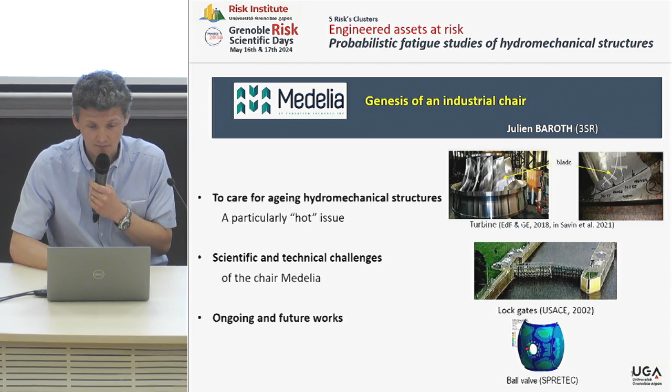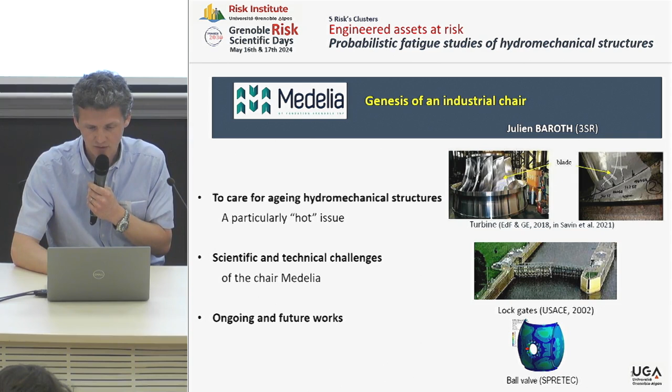So in our cluster, we proposed two little short focus. The first one is to highlight how the Risk Institute allowed us to initiate an industrial chair about the aging of hydromechanical structures, particularly the chair called Medelia. It means in Latin take care, about probabilistic fatigue of hydromechanical structures. And three very short items to explain why it is a hot issue, particularly around Grenoble, and some illustration just in the next slide.

Aging hydromechanical structures. Why is it a hot issue, particularly for engineers and for our operators in France and in the world? It is that we have many hydraulic works that are very old, several decades, more than one century sometimes. You have examples in pictures, lock gates. We have several thousand kilometers of rivers in France with such infrastructures. We have components of hydropower plants, for example, runners of turbines or ball valves. You have this example in front of you.

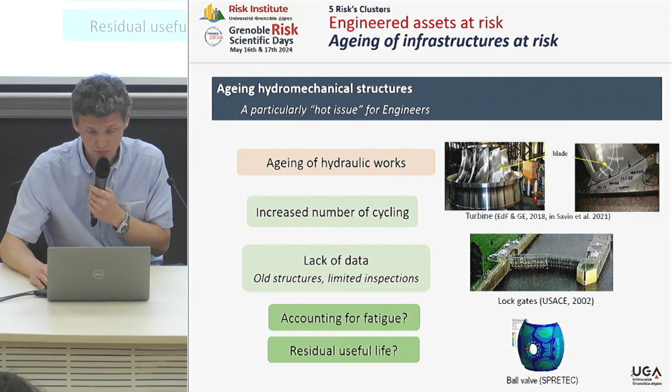And they have worked for decades, but instead of changing altogether, we have to take into account an increased number of cycles because of energy demand, of optimization, and because all these infrastructures are old, we also have a lack of data. How to account for fatigue, how to better estimate residual useful life. So this is a hot issue, particularly around Grenoble, because we have major operators in France and I would say in the world around Grenoble.

We have EDF, you probably know, the main electricity supplier in France, but also the main hydroelectricity supplier in Europe. CNR, for Compagnie Nationale du Rhône. This is a major operator along the Rhône River. It's a quarter of hydroelectricity in France, I think. And we also have large companies implanted in Grenoble for more than one century. Artelia, which is a group in the world with, I think, more than 1 billion euro sales.

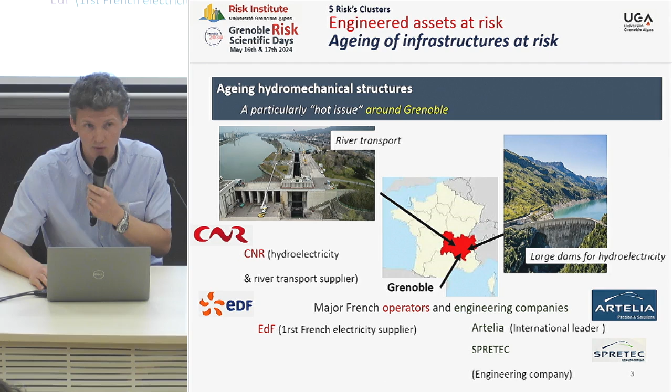All these actors, operators, stakeholders are interested by our research, and that's why we were consulted to help them, and it is because of a cross-disciplinary project that with Christophe Berenguer we decided to go and to try, because it was very challenging, because this team never experienced research with university.

And one of the results is this article, damage due to start-stop cycles of turbine runners under high cycle fatigue, with industrial data from the company, with a problem of instrumentation, with problems of mechanics from data, and because we were two complementary laboratories, it was possible and it was successful, and we provided an original methodology to estimate relative damage of runners and a cost indicator of start and stop phases of runners. That was really strategic for the company.

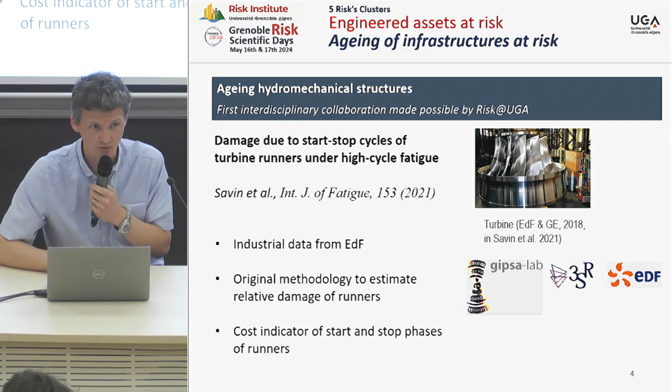So because of this experience, it was possible to accept another challenge with this large company called Artelia, particularly with an engineering company called Spretec, to help them deal with this fatigue problem of hydromechanical structures. And it began just this year. It is with another colleague, Rafael Estevez, who couldn't be there. He is from another laboratory, specialized in fracture mechanics, and I am more specialized in reliability analysis at the scale of structures.

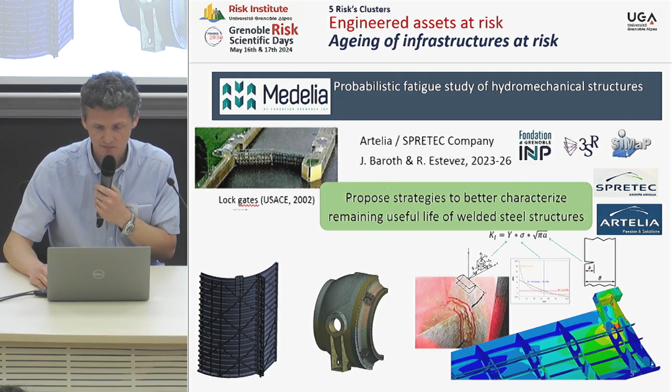And our aim is to propose strategies to better characterize the remaining useful life of welded steel structures more particularly. And you have examples of structures that can be studied in this company using experimental measurements, using finite element modeling at different scales. And the challenge is to account particularly for welded connections of, for example, lock gates that sometimes are not only old but with the beginning of fracture. So we have to change.

We have to plan maintenance to account for different uncertainties about material, about loading history, about geometry, boundary conditions, and we have some data also from CNR, another operator that is very interested in this topic, and we are all together developing some strategy about probabilistic fatigue analysis using the finite element model that I show you with a stochastic approach.

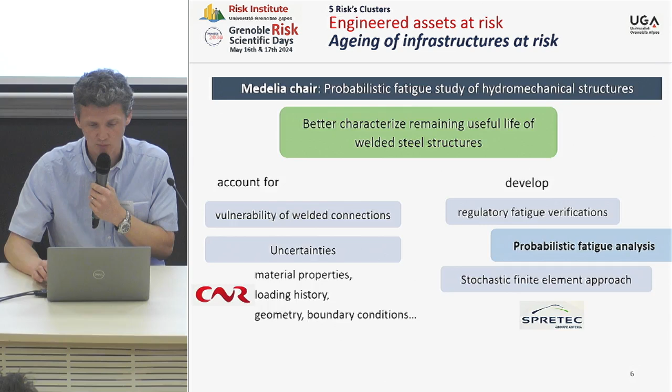So very practically, for example, for a lock gate, we can do the engineering study and focus on some assemblies, some connections that can be more stressed and with a probability of damage that can be higher from one to another. But it's very difficult for the operator to know if they have to change in priority because their estimations are too approximate.

So it is why our collaboration between two different laboratories, the colleague specialized in fracture mechanics at the scale of connection, me rather focused on stochastic finite element modeling, we are able to produce two-scale stochastic finite element calculations. We are producing new indicators. I'm already satisfied of results we have now to prove, to publish it, but it's ongoing work.

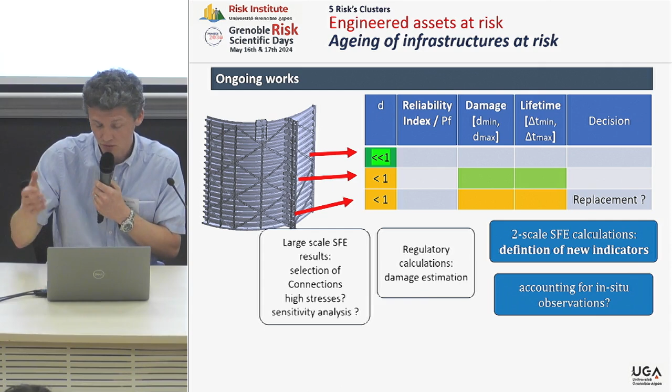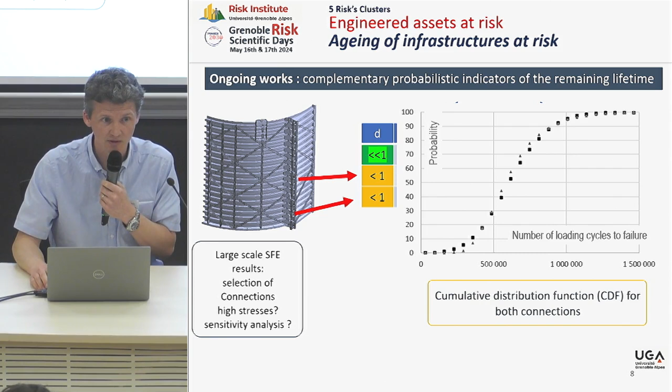And for example, a typical result, it can be a cumulative distribution function for all people working on probabilistic approach. It's very usual, but these cumulative distribution functions have to account for both fracture mechanics estimates and also stochastic finite element studies, because we cannot deduce everything from a too simple modeling at a whole scale of a structure. We have to invent, to be creative.

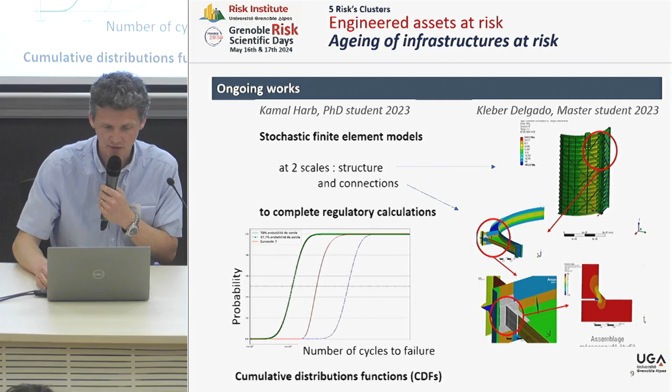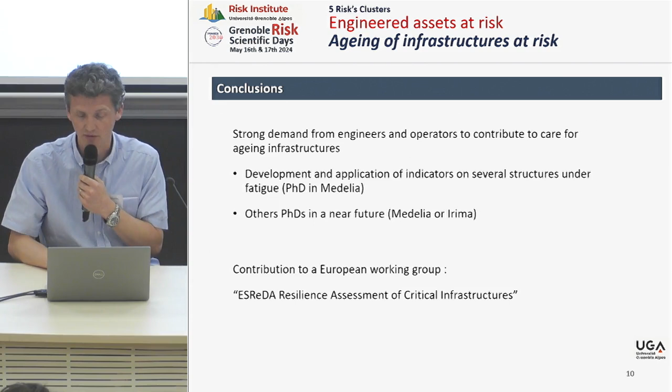And this is because of the strong demand from engineers and operators that we contribute like that to care for aging infrastructure. It's the name of the chair, Medelia. So we have other PhD in the near future in the context of this chair, but also in the context of a cluster. And particularly, we would like also to focus about a European working group called ESReDA Resilience Assessment of Critical Infrastructure. And I propose my colleague to talk a few minutes about that.

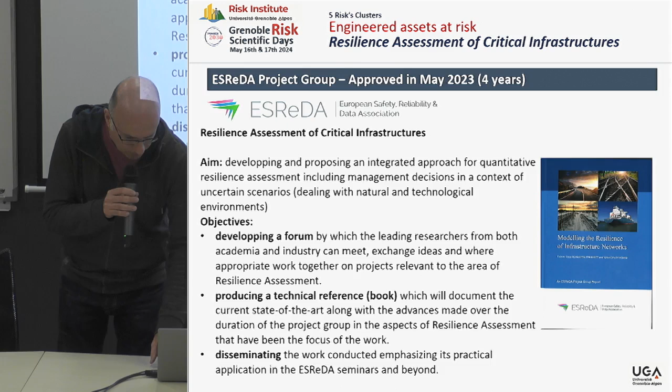Okay, I think we don't have that much time, so I'm just recalling in this slide the importance of resilience for critical infrastructure, that has become an important research topic, but also that has been transferred to the policy. For example, with the new directive that went in force in January 2023, naming explicitly resilience in its title, replacing the previous directive on critical infrastructure. And we are going to focus on resilience application for different kinds of critical infrastructures, each member of the group coming with its own knowledge on different kinds of infrastructures and sharing proven methodology and seeing how we can transfer this to other kinds of infrastructures.

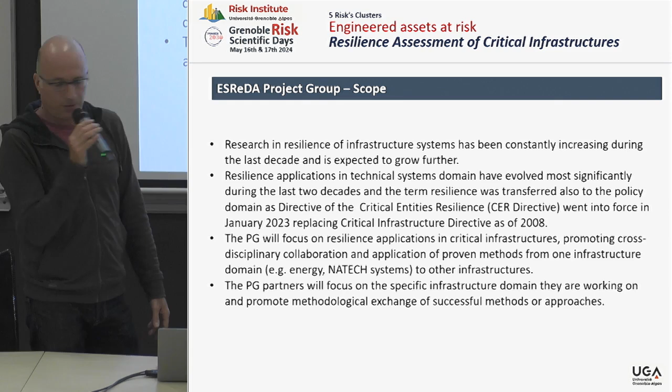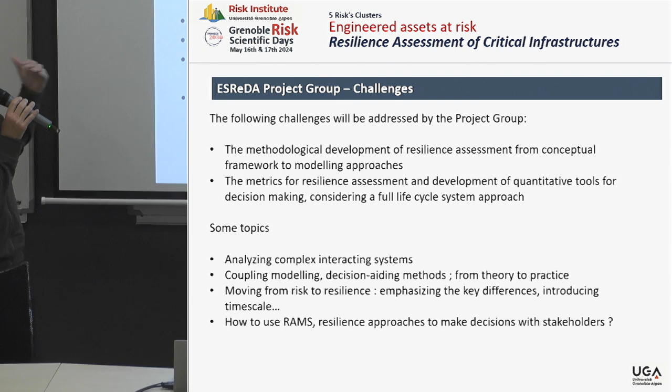Okay, so some of the topics that we have already identified could be, for example, analyzing complex interacting systems, coupling, or developing the complete chain from modeling to decision aiding applied on real examples, so going from theory to practice on this modeling to decision chain, and moving from risk to resilience, trying to identify the key differences and introducing one of the big problems of different time scales within these problems, and how to use, for example, approaches widely used in the industrial sector to go to resilience when they are coupled with natural hazards, just like in NATECH issues.

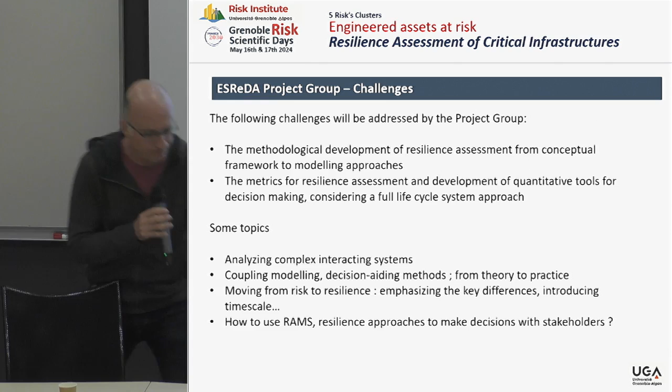Okay, so this is just the management of the group. We are two from the cluster involved in the management of this group, and we plan activity, mainly two meetings per year, and then sharing and proposing sessions to the main conferences in the field, and of course writing this book on the 3 years horizon of the project.